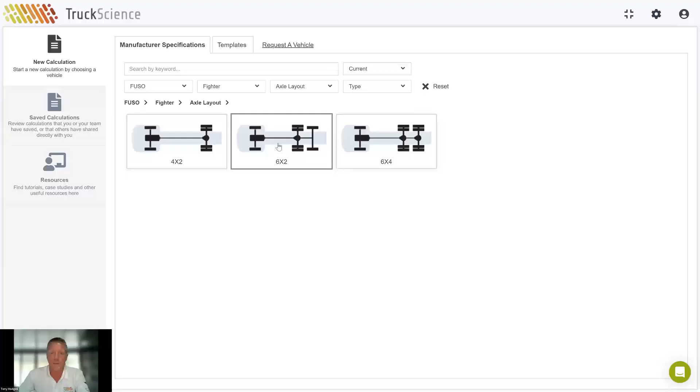There's a couple of ways that you can do it. The first way is you can click on the logos, so I can click on Fuso, I click on Fighter, 6x2, and you can see the models there. You can also use the ordering code, so if you've got the code from your spec sheet or wherever it is, you might have that code. The other way, if you know the model that you're after, you can also just type in up the top the model that you're after, and it will come up on the screen. So you don't always have to go through the menu options and the logos.

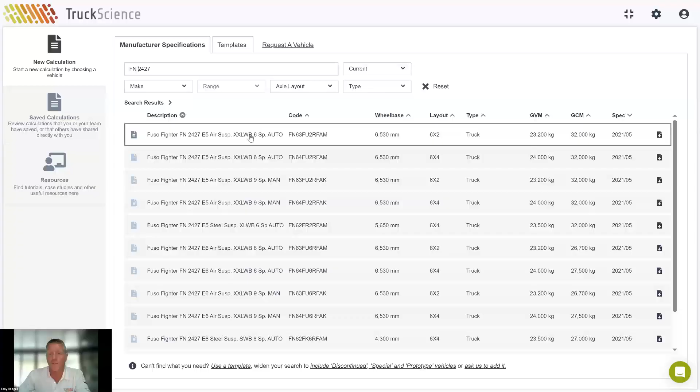So for this one here, we'll pick the 6530 wheelbase Fighter. I'll click on that one there.

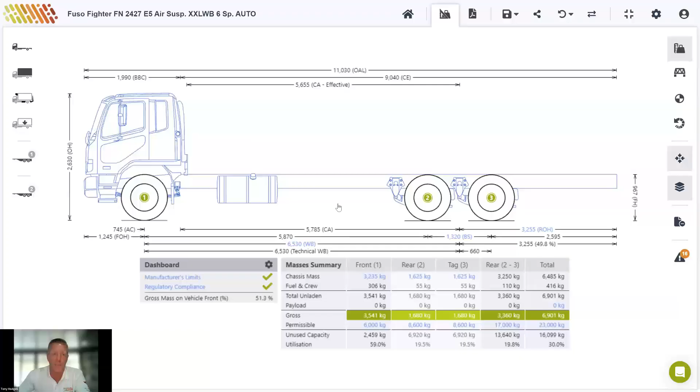So you see the different wheelbases that we've got, a visual representation of the suspension. This one here is airbag, if it was steel we actually show that as well, so you can see straight away what the suspension type is. Now in Victoria we get a road-friendly exemption or road-friendly suspension exemption, so the rear axle group between 2 and 3 on this one here is 17 tonne. We'll go through a little bit further how that exemption works and when it is applicable and when it's not.

Here we have a dashboard. This dashboard has manufacturer's limits, so obviously the axle capacity limits, or anything to do with the manufacturer of the truck. Then we've got the regulatory limits, so if the rear axle group was good for 18 tonne, but regulatory is only good for 16 and a half or 17, then you'll see manufacturer will have a tick, but regulatory will have a cross. So these tick boxes and red crosses that happen here are representations of everything in the drawing, so you don't have to look around in the drawing to find them. You see these green ticks, everything in the drawing is okay.

Now we built the truck up on this left-hand menu, the same as you would in real life. So you grab the chassis - we started with that. The next one, we'll grab a body. The next one down, we'll add accessories, tailgates, tow bars, fridges, etc. And down in this next one, we can modify the payload - we can use a water level load or a simplified load, or you can have a detailed payload with pallets, you can put anything on there basically. If you've got beaver tail bodies, you can have bobcats, excavators, and that all happens down there.

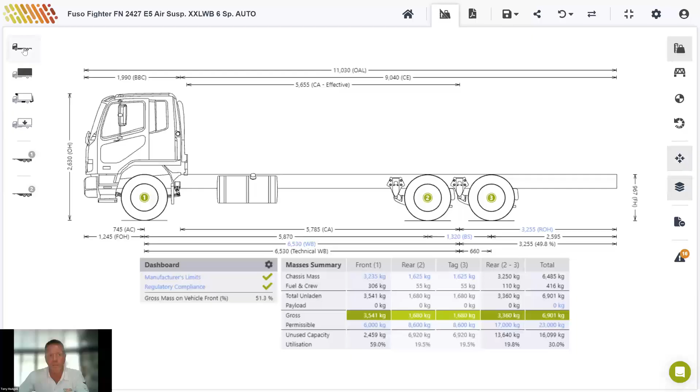So we'll start working from the top down. We've selected the chassis. The next one down, we'll grab the body - I click on vehicle body. We'll grab a van in this case, so a box van. We'll go in here and grab box van template. Now you'll see it's matched the body size for the particular truck.

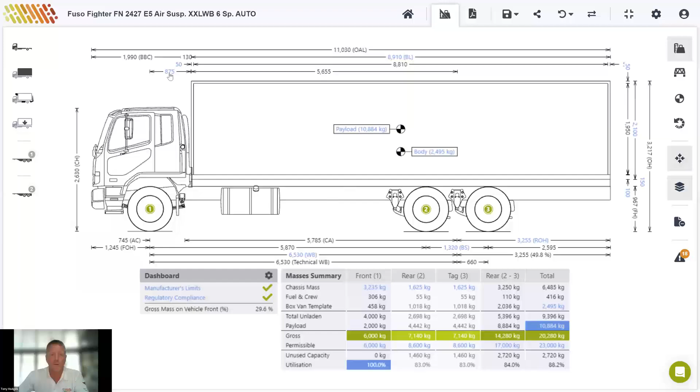So I'll change just a couple of things on there. I'll just push the body back here - I'll go 985 mil to increase the cab gap a little bit. You can actually drag it with the mouse as well. So anything that's in blue on the screen, you can click on directly. So I'll click on the body length there - 8840 for that, I'll just change the 100. You can use the plus or minus buttons, or otherwise you can just type the number in directly.

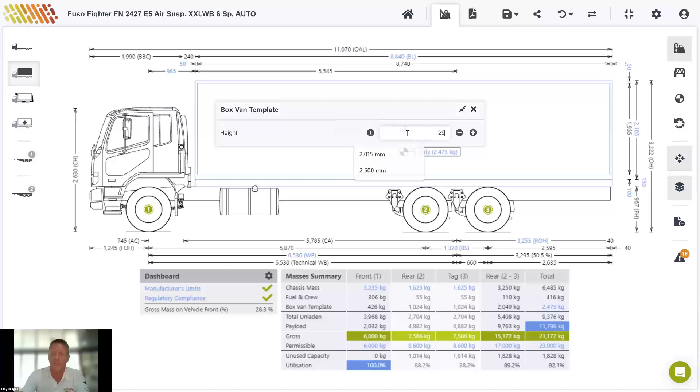Okay, so in here we have the body weight already set for a normal van body, so Colorbond or pro bond, something along those lines. If you click on the body, you bring up all these specifications of it - lengths, heights, width, etc. So you can change it, put 150 mm headboard in, and so on.

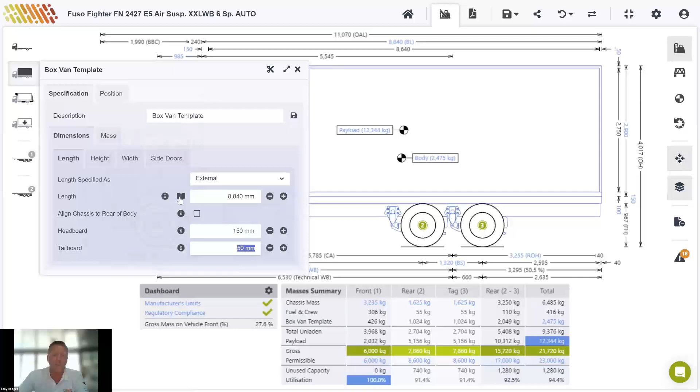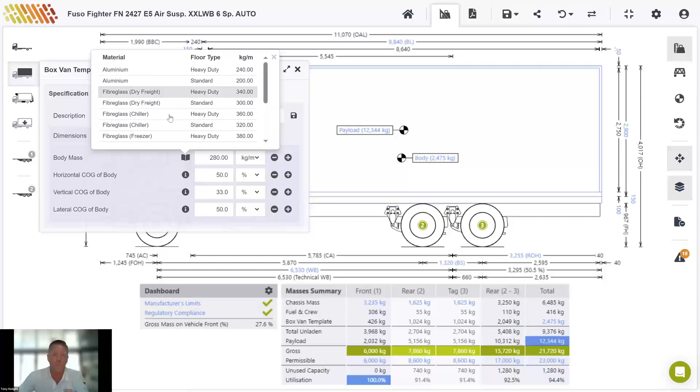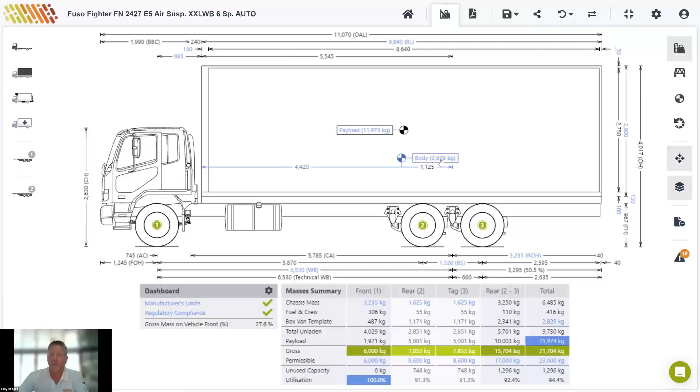Now we do have these little buttons here with the book. If you look in the mass section, you'll see we've got 280 kilos a meter, and you can also type in the kilograms of the body itself. So all different body types have different weights. If we click on the little book icon, it gives you recommendations for that particular body type - so if this was a curtain sider, it would say aluminium, steel, heavy duty, standard. Because it's a van, it gives us these different weights to go with different bodies. If it was a beaver tail, it wouldn't give you things like a chiller. So for this one, we'll just go fiberglass chiller - it changes the weight there. Now you'll see the body weight has gone up for the increased weight, and then the payload has come down.

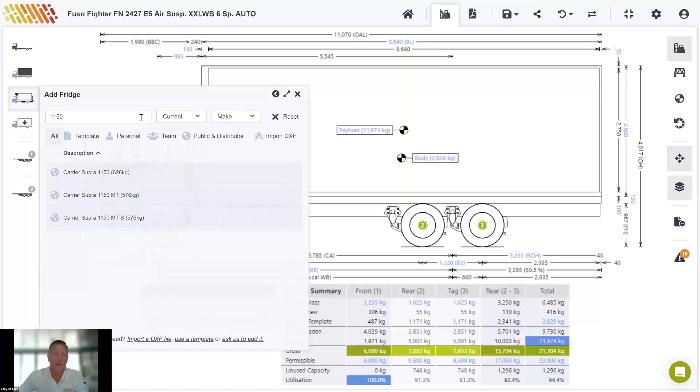So what we'll do is we'll work our way down. We've got the body, next thing we'll do is add an accessory on it. So go in there, add equipment, grab a fridge. You can go down and type in any number, or select it by make, or in this case here we already know the fridge that we want to grab - we'll grab a Carrier Supra. It will put it on the front where it should be.

And this is the truck that we'll basically start with. So the way this table works, we've got ticks inside our dashboard, that tells us the basic configuration of the truck is okay. We're under 60% overhang, we're under 3.7 meters, we're under 4.3 meters high, and the basic truck is okay. In this mass summary, we have a summary of the different items - what the body weighs, what the fridge weighs, or any other accessory we have. So we've got the total unladen weight, which is the tare weight of the truck, and then what we have is what the truck is capable of carrying.

So in this case here, we've got 23 tonne because I've got it set to the Victorian regulations, which come in at 17 tonne. If we were to change that, what you'll see here is we've got regulatory compliance - we've got Victoria there. What you can do in the regulatory compliance is select national and other states, so national Victoria, or just national.

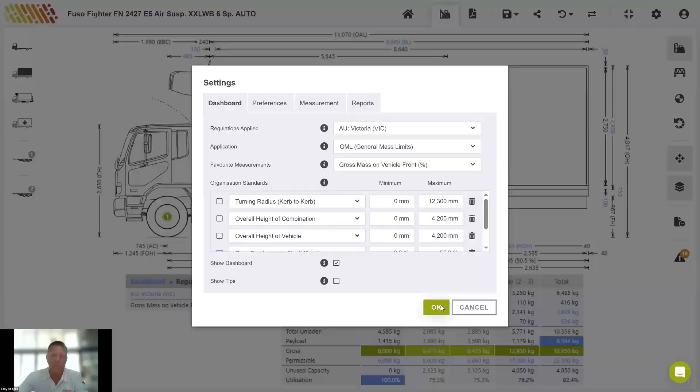So if you have a vehicle that was leaving Victoria going to Queensland, you can select Victoria, New South Wales, Queensland. And what it will do is build that vehicle to the lowest common denominator for all three states, so it can traverse all three and be legal between them all.

So here we've just got Victoria set for the minute, and there's a reason why we've got that, because I'll show you how that exemption works and doesn't, and where it does and doesn't apply.

The other part we have in the table along this line, we've got permissible. So in this particular truck, we've got 6 tonne on the front axle, and 17 tonne on the rear axle, 23 total. It's telling us right now that the vehicle has been underutilised by approximately 4 tonne, and it's been utilised at 82%.

The blue here tells us that the vehicle is capped out at roughly 8,600 kilos of payload because the front axle has hit its limit. So in this particular case, if we added maybe a tailgate, that would take a bit more weight off the front, or it's a wheelbase change, or something along those lines. But right now, the front axle on this particular truck for this body length and this wheelbase, that's what's holding us back, is this line here in blue.

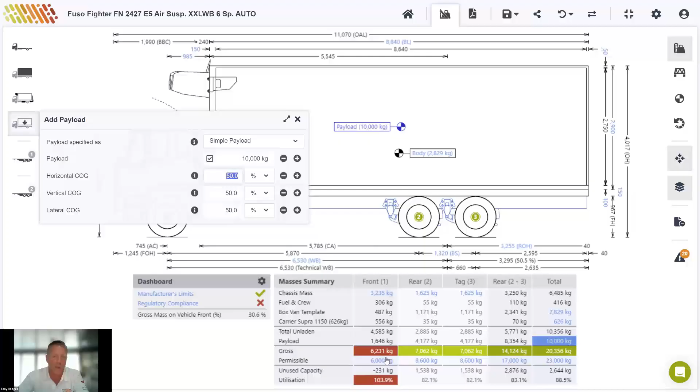If we were to go over a limit and we type a payload number in, so let's say we wanted to do 10 tonne, what you'll see is it's done the 10 tonne as a complete vehicle. We're under the GVM, but as far as the axle limits are, we're 231 kilos over. So I'll untick that box there and go back to the Truck Science calculated payload.

Now, it's not a very commonly known part of the road-friendly exemption, but once you add a trailer behind that truck, you actually lose the exemption.

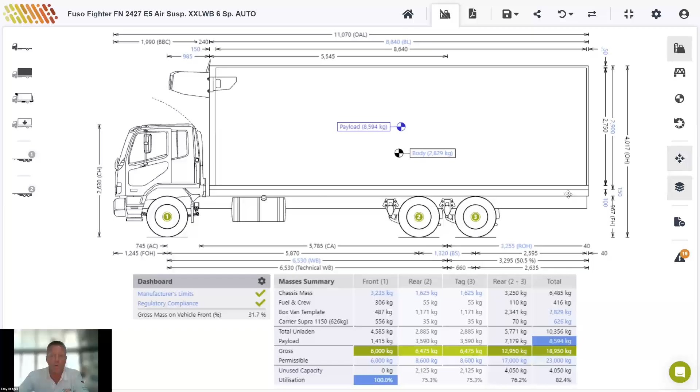So what we'll do is we'll go over to our accessories where we added the fridge. We'll go over to the vehicle equipment. I'll add a tow bar under the truck. I'll just use a nice Bartlett tow bar there, BT 1400A. You'll see that it goes in the right position where it should, at the back of the chassis.

Now, having the tow bar alone, you still maintain that exemption. So you'll see we're still at 17 tonne. Once I add a trailer on, if you're watching that rear column, you'll actually strip the road-friendly exemption, and it will drop it down to 16.5. So that's actually by design, because that's how the regulations are worded.

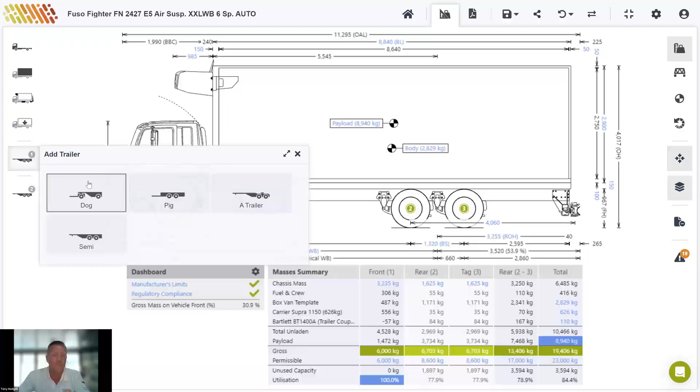So if I go in here into the dog trailer, click in a dog trailer, we'll grab our one that we've already built up. So in the trailer section, you'll see we've got trailer 1 and trailer 2. When you're working on trailer 2, trailer 1 collapses. When you're working on trailer 1, it opens up.

So the boxes to build a trailer up, the way that I built that trailer, is exactly the same as you build the truck. You start with the trailer, add the body, add your accessories, fridge, tailgate, etc., and then the payload. So to speed it up, we've already had that one saved, but it's exactly the same process as the truck.

So now that we have the trailer on the truck, we're under Victorian rules, it now says the regulations say that when a trailer's on, you lose that road-friendly exemption. So now the rear axle group goes down to 16.5 tonne.

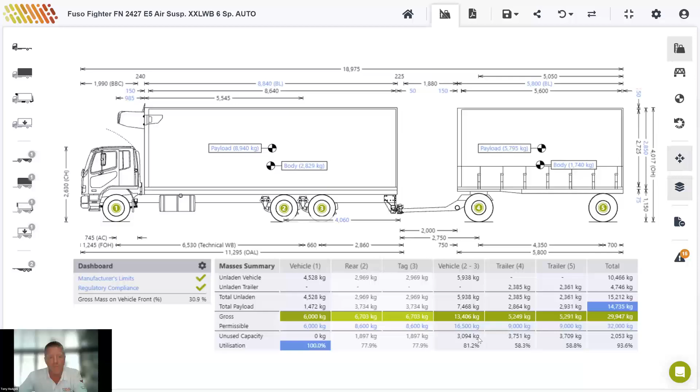So this goes the same for 4x2, where we normally get 10 tonne on a road-friendly suspension rear axle. Then it strips it back to 9. If you're in national rules, it leaves the rules as it is.

Now, as Martin mentioned before, with the heavy vehicle national law, with CML becoming the new GML, when that becomes a part of the regulation - it hasn't been signed off yet, but once it is, then those rules there will come in. If Victoria still has that stripping of the rules, that will be in there. But if that's taken out, which I would dare say it will be, we just need to wait to see where the regulations are at, then those regulations will update the minute that comes in.

So being based in the cloud, the minute that comes in, you don't need to update the software. You don't need to do anything besides just log in. And then the regulations are in force that day. That's when they become available to you in the software.

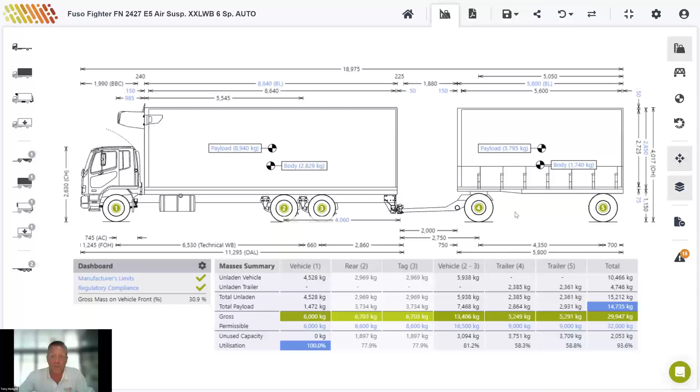So in here we've got our 16.5, we've got 32 tonne and 14 tonne as a payload for the combination. So what I'll do is I'll remove this trailer. You'll see we're under our 19 metres, we've got tick boxes, everything's okay in the world. So I'll click on here and remove the trailer.

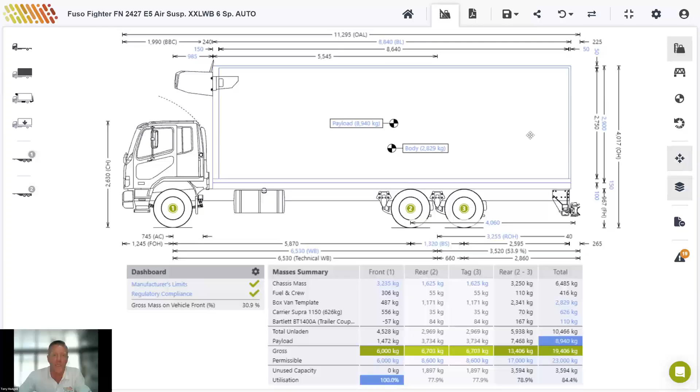So what we have with the truck is, if I want to build up another truck, as Martin said before, we'll put an Isuzu on this. We'll use an FVL, equivalent 6x2 model. Rather than going back to the menu and starting the process again, we have this swap vehicle button up here. When you click on this button, it leaves the tow bar, the body, the fridge, and pulls the chassis out from under it and puts a new one under. So I click on swap vehicle and I'll put in there FVL.

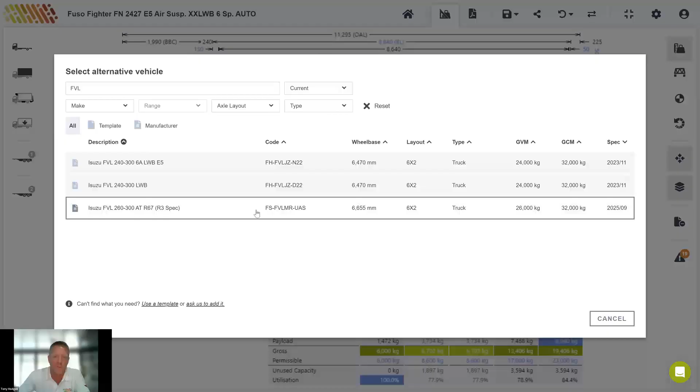So we've got a couple of different models. We've got the Euro 5 model here, it's got the spec date, and then we've also got the Euro 6 model - you see here by the 9th month 25. So I'll select this model here. What it will do is pull the Fuso out and slide the Isuzu underneath it. So what comes up says, do you want to change the name of this? Basically, what you'll call your save calculation - if you want to change the name, so we'll hit yes.

And now we'll see that we've got the Isuzu under there. Body remains the same, tow bar stays in the right position. Now you'll see on this particular one that the chassis is a little bit longer on the Isuzu. So we can either click on the rear overhang here and change it, or you can click on the body, and on the body length bit you go align chassis to rear of body, and that will actually trim the chassis back to match the body.

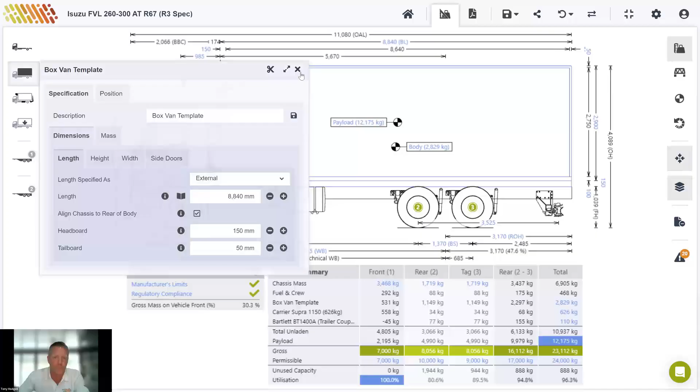So on this particular truck now we've actually got a payload difference that happened. We were approximately in the 10 tons on the Fuso, but because this truck here has actually got 315 tyres on it, and it's a Euro 6, it actually meets the ruling for the 7-ton front axle. We had 6 on the Fuso. It goes through all the different items of the truck. So if I click on that front wheel, you'll see in here in the tyres, it's actually got it listed as 315 tyres - on the Fuso I had 275 tyres.

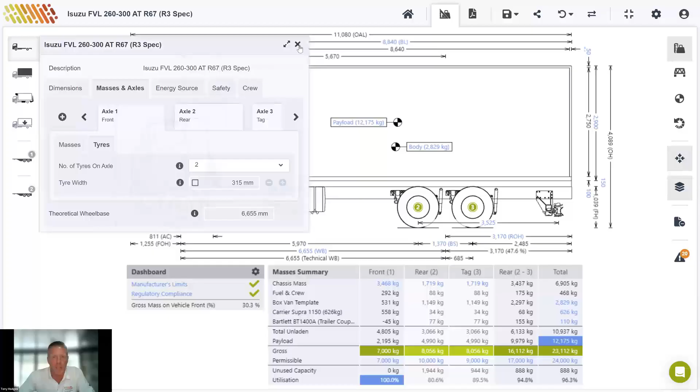So it's not just a one rule fits everything - each particular truck has its own particular items that says it does and doesn't meet particular rules. In this case here, we'll see that the truck itself has got 7 ton on the front - the front axle has maxed out as well. We've got the rear axle here has come in at 17 ton, and it's about 890 kilos light. So the whole vehicle right now is 96% utilisation of the vehicle.

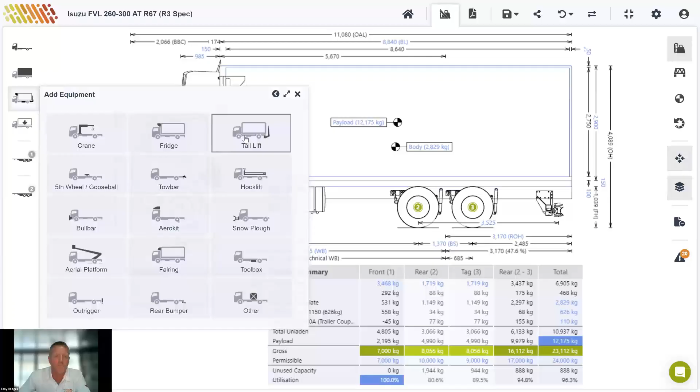So not a very common thing that happens, but you can put a tailgate on when you've got the tow bar there. So I'll just go on my vehicle equipment, click on our plus section there, I'll go on the tail lift. Just go and grab an Anteo cantilever, so I'll pop that on the back there. We can just grab the tow bar, move it around if we need to.

So you'll see with the weights of what's on there now, at 99.5% utilisation, this truck is now pretty much as best as you're going to get for that particular size. So the extra weight of the tailgate down the back - you'll see it comes under the additional equipment there - it's actually taken some weight off the front axle to add down the back.

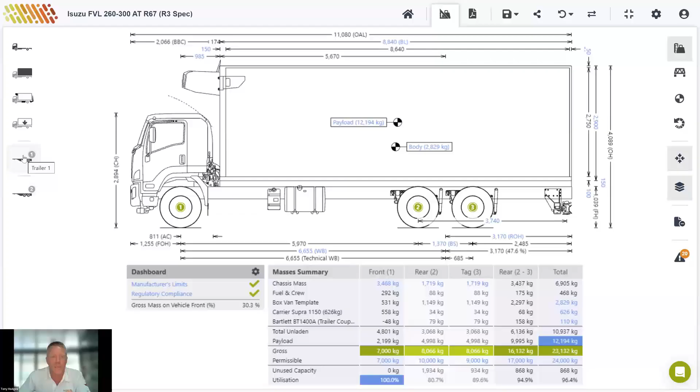So I'll remove the tailgate off there - you click on your little scissors icon there to remove it. And then what I'll do is I'll go through and add the trailer back onto this particular truck. So go in there, trailer, dog trailer, and you can select the configuration that you'd like to select there. So we've already got this one here made up.

So pop the trailer on, we can see that we're under 19 metres, which when the new rule comes in, if the vehicle meets all the different requirements of it, then 20 metres will become the new rule. If it's with semis, if it covers dogs, then it will cover that as well. So it doesn't just look - the software doesn't just look at that's a trailer behind a truck, it looks at what particular type of trailer, what particular bodies, etc.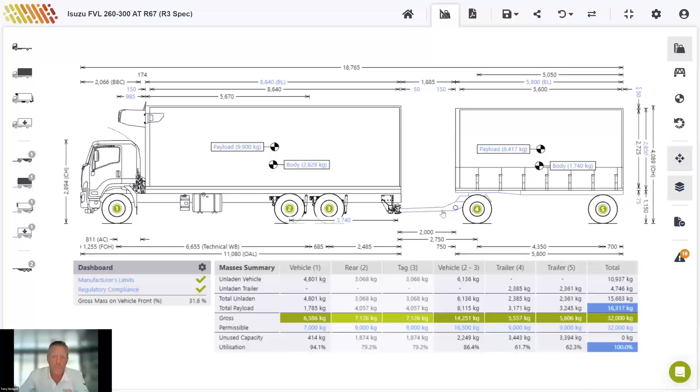are on there. So what I'll do in this case here is I'll just change a quick number on this to make it go over. So I'll change the body length there to 6.5 metres. I'll push it out a little bit.

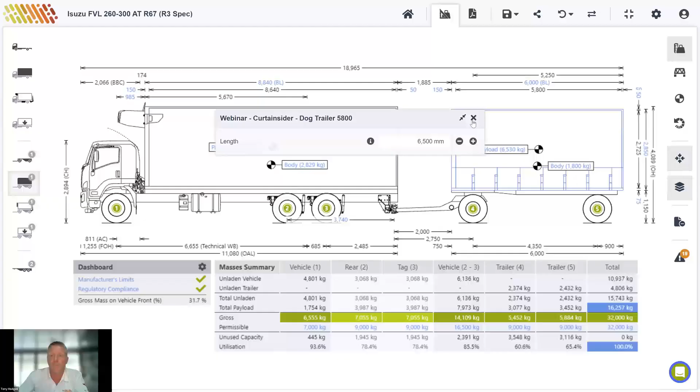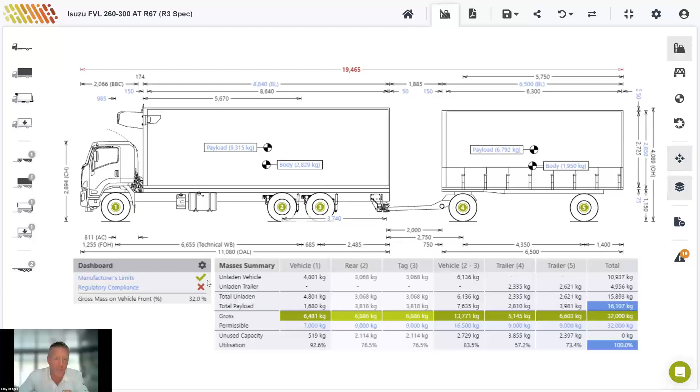You'll see this has actually pushed us over 19 metres, so it's come up with a red section there. The manufacturer's limits are okay because the trailer is still compliant, the truck's still compliant from a manufacturer's level.

But regulatory compliance is an issue. So to see what that one cross there is, you can click on regulatory compliance. If it's got other states listed, it will list them there. You can click on the regulations in force, and you'll see all our masses are okay, axle spacing is okay, turning circles okay. It's just we've got a problem with dimensions.

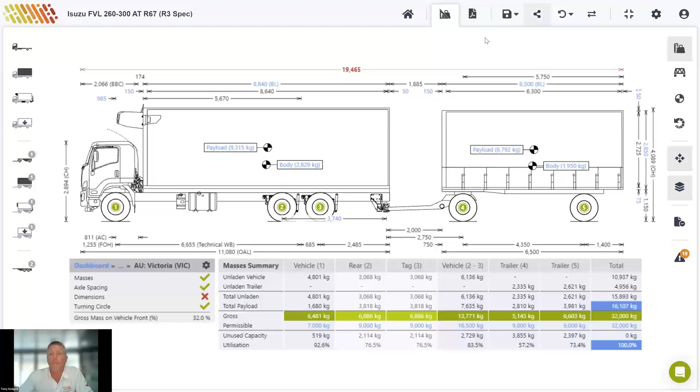So in the PDF, when you print the PDF out, you'll see that it will actually list on the last page what the problems are. So if I click on this button here to view the PDF report, click up there, what you'll see in this grey section of the screen, this is the PDF that will print out, that you can either save as a PDF or print out on your printer.

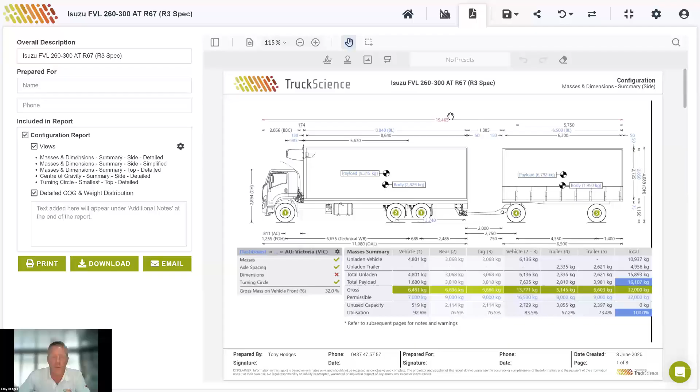Now you can select what views you do and don't want to view. If you want a detailed view with all the dimensions, or something simplified without dimensions, you can select them on the left-hand side here with your views option. We also have the top view, so if you want to do pallets from a top view, you can see that while you're actually calculating the vehicle.

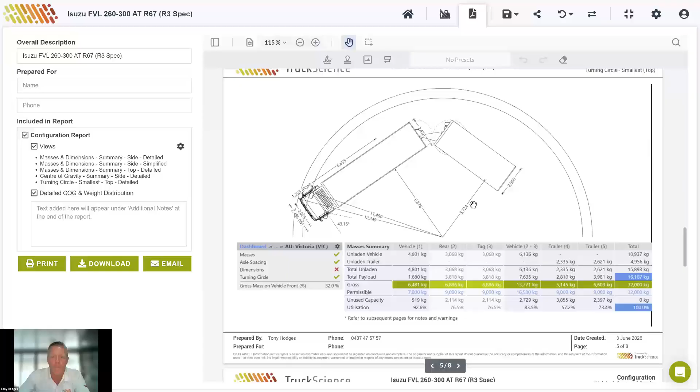We've got center of gravity view, turning circle, and down in the very last pages we've got notes here, showing what particular vehicles or what particular regulation is being enforced. We'll say rear overhang has been reduced. And you've also got your warnings. So anything in notes is just for information.

But then in the warnings, it actually says a defined bit to say we've actually gone over the rules. We're 465 mil over the 19 meter maximum.

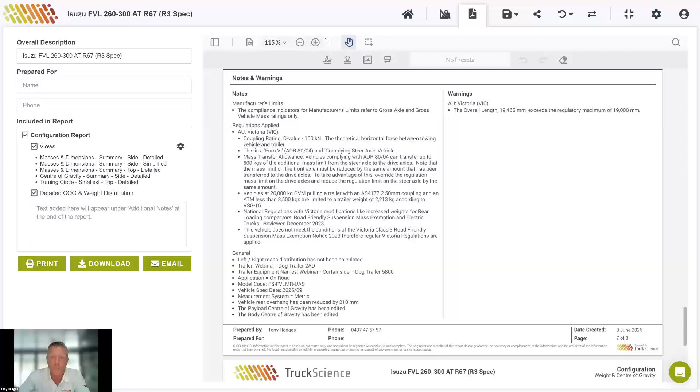Can we see the truck GVM in this view? So assuming that was when you had the trailer on, maybe if you just drill down on the permissible there in the total column, that 32,000 kilograms, if you drill down on that, then it'll open up the menu and you'll see the rated gross vehicle mass at the top there, which is 26 tons.

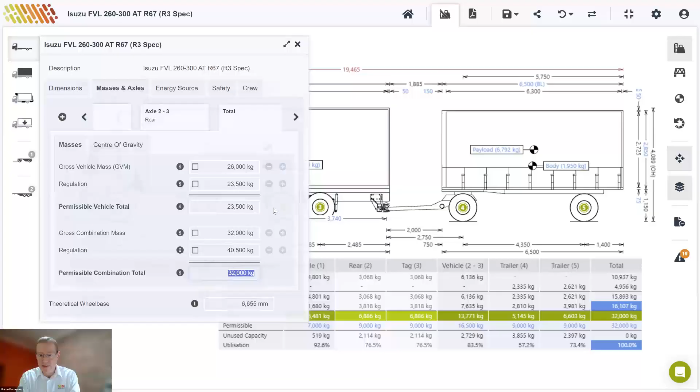But I'm wondering if the question may also be referring to what is the actual gross vehicle mass on the vehicle at the time. Because when you have the trailer on there, you'll see we're showing the total for the vehicle in the first row, which is 10,937, and the trailer, which is just under 5 tons. So maybe you can point that out as well, Tony, the actual gross vehicle mass.

You can probably close that menu and then go back to the weights table there. So the first row, the unladen vehicle, you'll see is 10,900. But now you may want to know what is the actual laden vehicle, and that's not easily visible now in that mass table because it's very much focused on the combination.

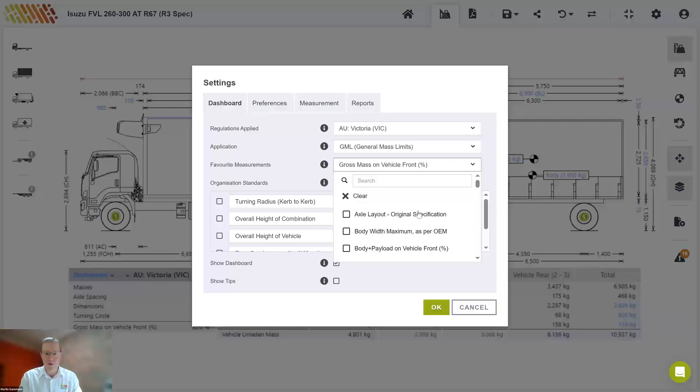And for that, we have the favorite measurements on the dashboard. You'll see there's one favorite measurement called gross mass on vehicle front as a percentage. Maybe, Tony, if you go to settings, I'll show you how we can add the gross mass on a vehicle. So if you go to favorite measurements and click on that drop down, just search on gross, type in gross and scroll down. You'll see there's gross mass on trailer 1, 2, and then vehicle, gross mass on vehicle.

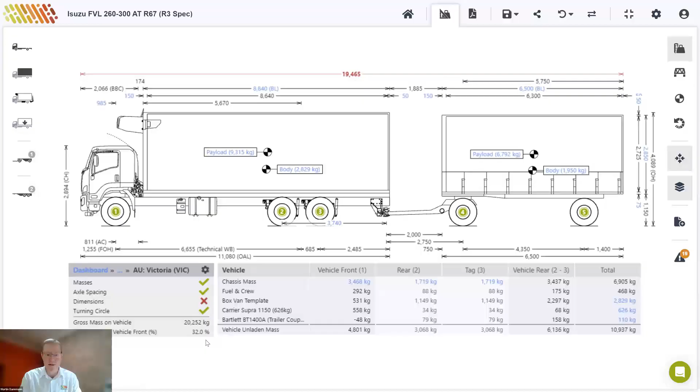One up from there, yeah. You can just click that and click OK, and you'll see it'll add the gross mass on the vehicle to the dashboard, which is now just over 20 tons. So I'm hoping that answers the question, just to demonstrate how you can add certain weights and dimensions by using favorite measurements from settings.

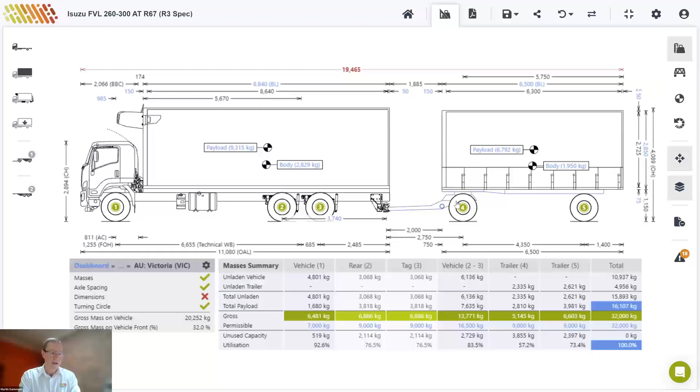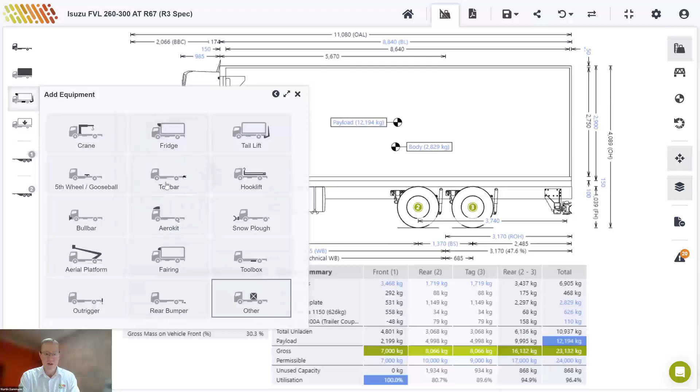We had another question about whether we can add a forklift and accessories, like a rear-mounted forklift such as a Moffett or Manitou truck-mounted forklift. You can just go to equipment, other equipment, on either the trailer or the vehicle. You can demonstrate this by going to other equipment and searching for, for example, Moffett, and you'll find the Moffett forklifts there. You could even throw one on there just to demonstrate, and reposition it by dragging it to the back wherever you need it to be.

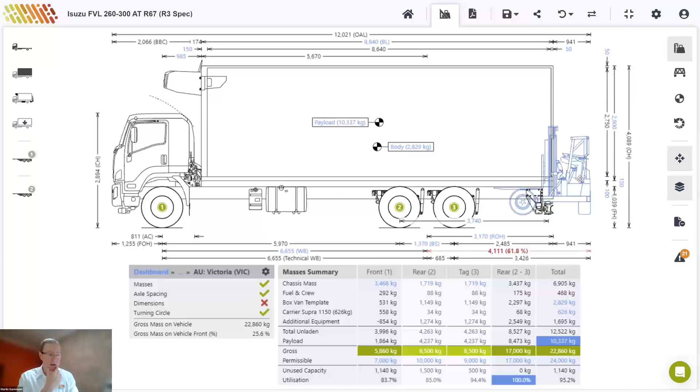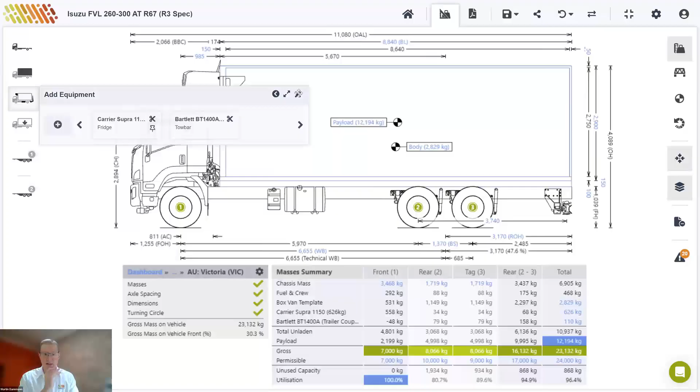So what you'll notice is when the question came up about vehicle masses, in your weights and summaries section, when the trailer's on, you can select vehicle, and that changes the whole mass summary back to just the vehicle without the trailer. When we've got the trailer on, it gives a summary of all of it.

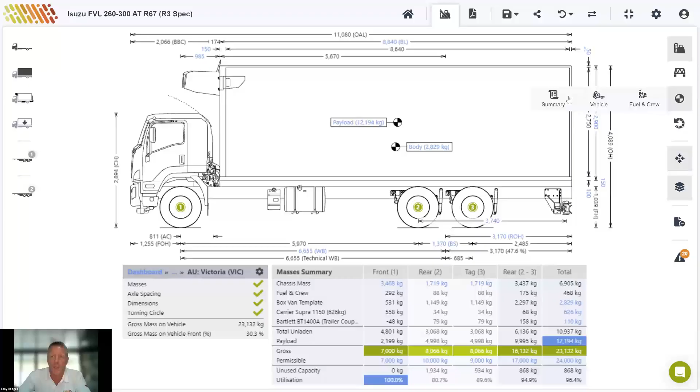Then we've also got the center of gravity view. So if you want to see individual items on the vehicle, you can look in there as a summary, and it'll show the fuel position from the front axle - we use that as a datum - the payload, the body, the tow bar, etc.

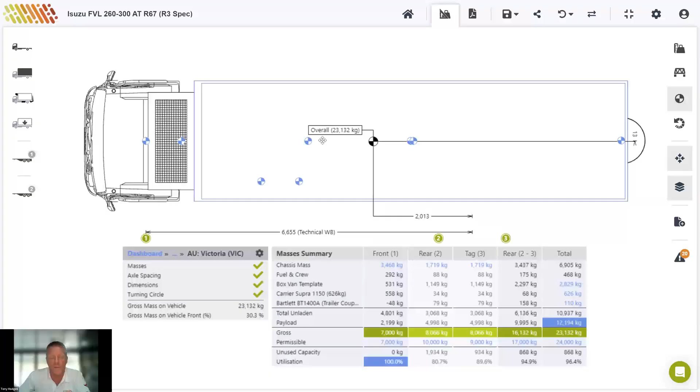The other bit we've got in here is a top view. So we've got the normal side view, but then we have a top view as well. If you do have pallets, for example - we started off before with a simple payload - you can go into your payload section, go to detailed payload, and we'll just use a pallet, for example a pallet of milk that we've already got here.

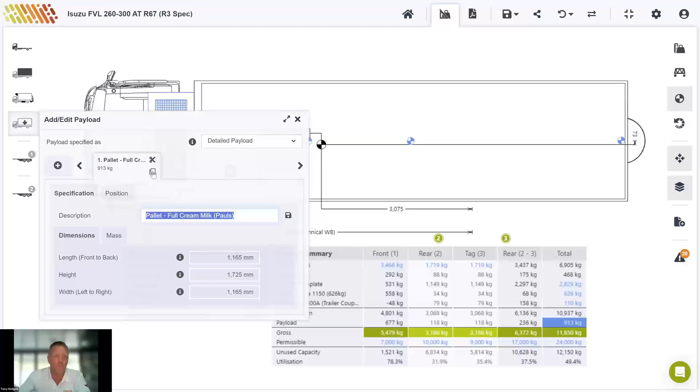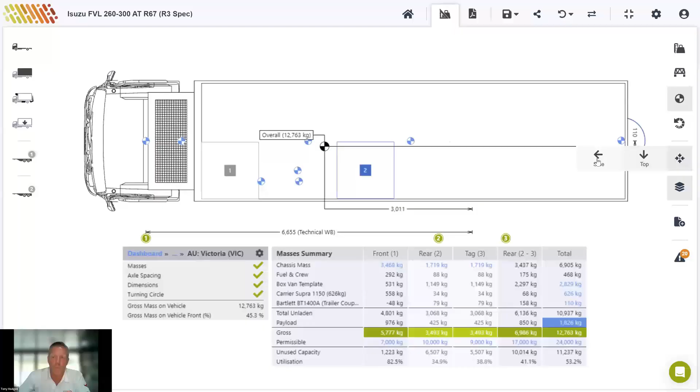What you'll see is from the top view, you'll see one pallet. So we've got blocks of pallets - 12, 14, 10 - or you can actually add multiple pallets by hitting this little copy button, and then move those around the vehicle. You can just drag them around, or you can position them by typing in the number. We go back to our side view, and then you'll see these pallets are in position here.

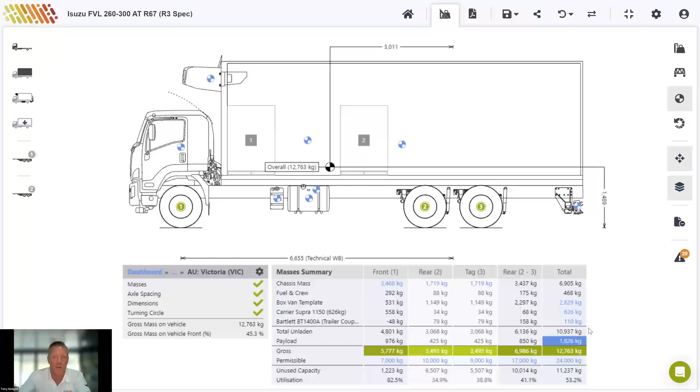So you can have bobcats, motorbikes, boats - a whole range of different items that we've got there. The Moffetts and Manitous can go at the rear as a piece of equipment, and you can also add stuff in as a payload. The difference is that when you do it as a piece of equipment, it goes into the unladen weight of the truck as if it were a permanent part of the truck. The payload item, if you have the forklift in the back, gets treated as if it's removable.

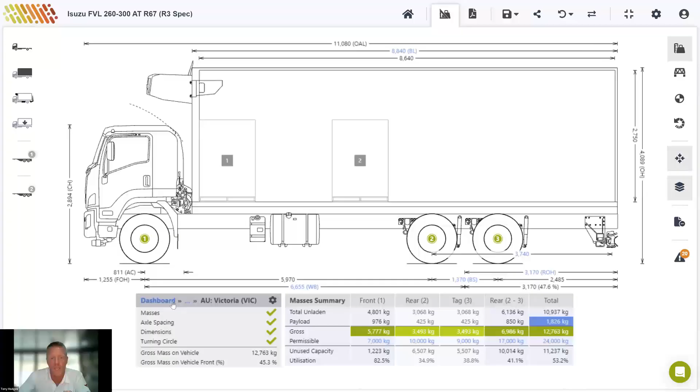The other option we've got, if I go back into the view with all our dimensions, is this button here. Right now we've got detailed measurements in there. If you click on the simplified view, it strips away a lot of the measurements. So the calculations and measurements are still there, but when you print it out, it actually does a less cluttered and simplified view, which is what we see here. If you want to go back, click on there, click on detailed, and it goes back to the detailed view.

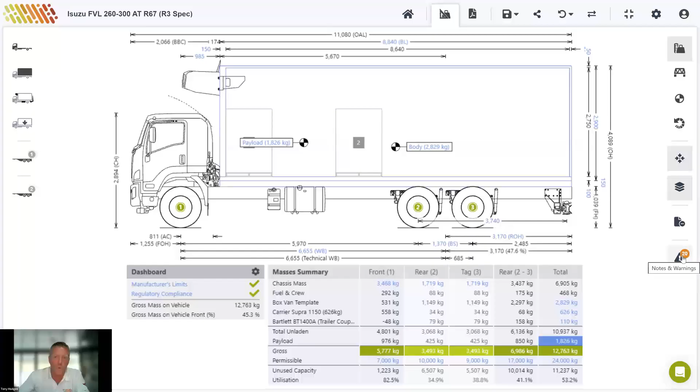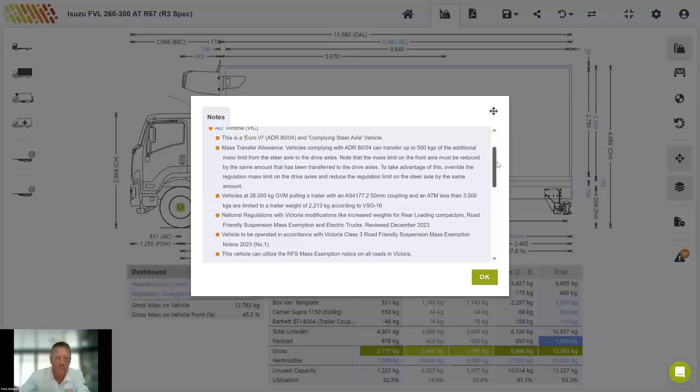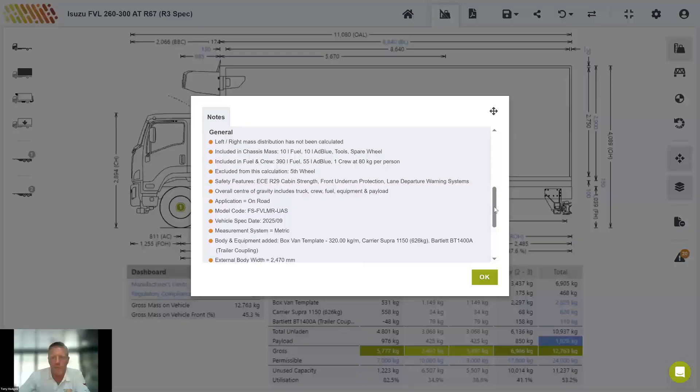The other item we have down here is the warnings triangle. This notes and warnings is actually a replication of the last page of the PDF. We've got no warnings in this drawing now because we're within all the measurements, but you'll see in here that we've got some notes. So if it was a 50mm ball coupling, the reduction that you get under VSG-16 - we've got in here about the rear overhang having been changed, vehicle rear overhang has been changed. So if you go through that list, tick it off, go, okay, I started the truck two weeks ago, but now we've got the truck, we're ready to get a quote on it - you go through that notes section and it will tell you if anything's been changed: wheelbases, rear overhangs, etc.

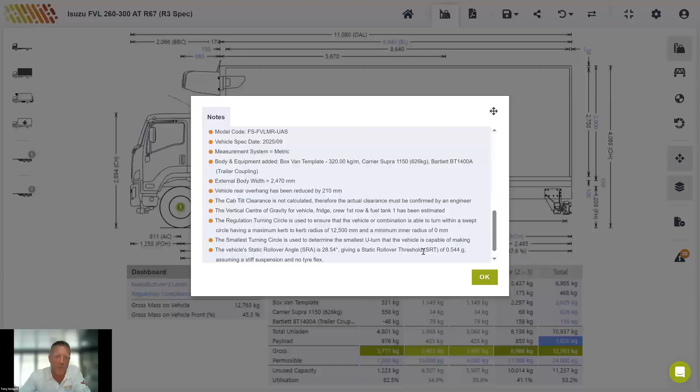So have we got any more questions there, have we, Martin? Yeah, Tony, maybe I was busy typing it out, but I can maybe also just explain it.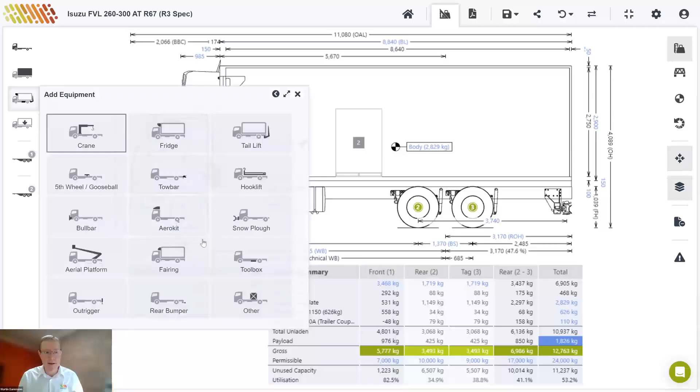So there was a good comment there about the forklifts. When you add other equipment, there's no categorization of the other equipment. There's no section for forklifts and fuel tanks and any specific other equipment that doesn't fall into the other categories. So if you just go back to other and click into it, we've got specific categories, but forklift might be a bit tricky to find here.

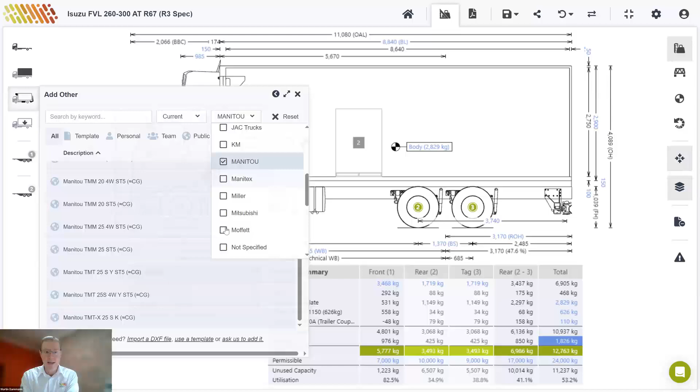Or if you go to make, you'll find it. Let's try Manitou - there's Manitou, maybe that would help. And then there's Moffett. So you can search on the make, that would definitely make it easier. But I hear you that you can't search on, say, all forklifts. This is good feedback, and we'll take that back to the developers to see if we can add more filtering options to make it easier for you to find the equipment you're looking for.

Ideally, we could even have another category just for forklifts. So that's the kind of thing that we do based on the feedback that we get from our users. So thank you for that.

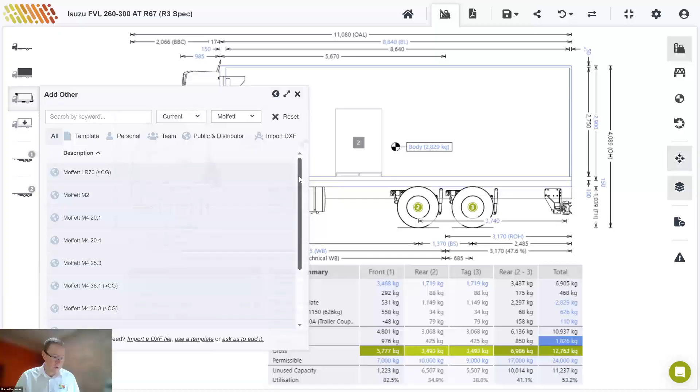Then I'll also just see there's another question here. When we add less - okay, so changing the wheelbase. That's another good point. So the question relates to the change to the chassis mass when changing the wheelbase. We do not automatically recalculate the chassis mass when changing the wheelbase.

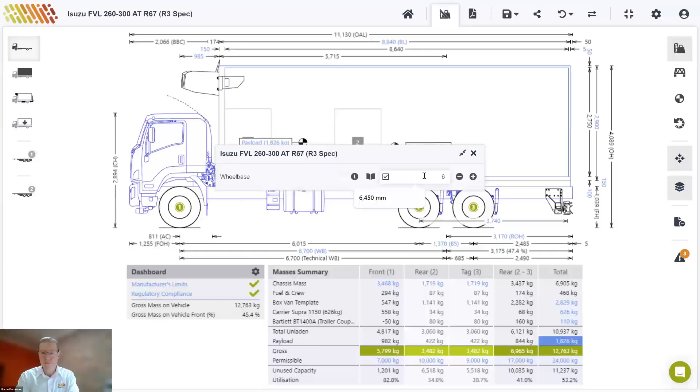Maybe Tony, if you just do a slight adjustment to the wheelbase there, you'll notice it'll pop up with a little tip. You can just change that by 100 millimeters or so, and that's fine. We can't in this case make it longer, maybe make it shorter. So when you change the wheelbase, you will need to adjust the chassis mass manually, and I'll show you how to do that.

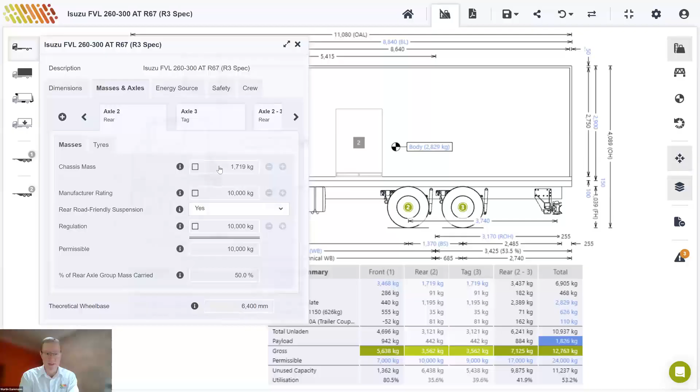Or Tony, if you can just click on the front or the rear axle and then highlight where to change the chassis mass. So that feature of automatically changing the chassis mass is something that we've also documented. It is just a little bit tricky for us to get the exact spec from the manufacturers in terms of what is the mass per running meter of chassis length that we can either cut out or add in when doing these adjustments. But that is definitely something that we are aware of.

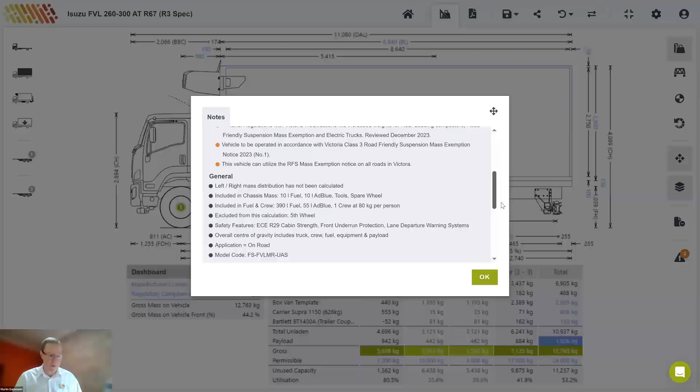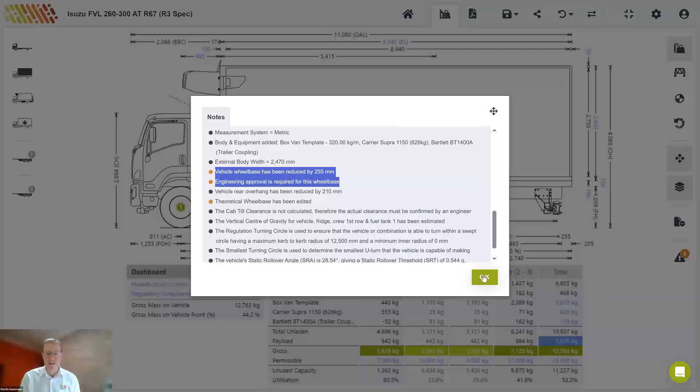So for now, please remember to make that adjustment manually if you change the wheelbase. Okay, then let me just see if there are any other questions here. I think that's it for now, Tony. Is there still something else that you need to demonstrate? No, man, I think that shows pretty much the whole suite of the features that we've got there.